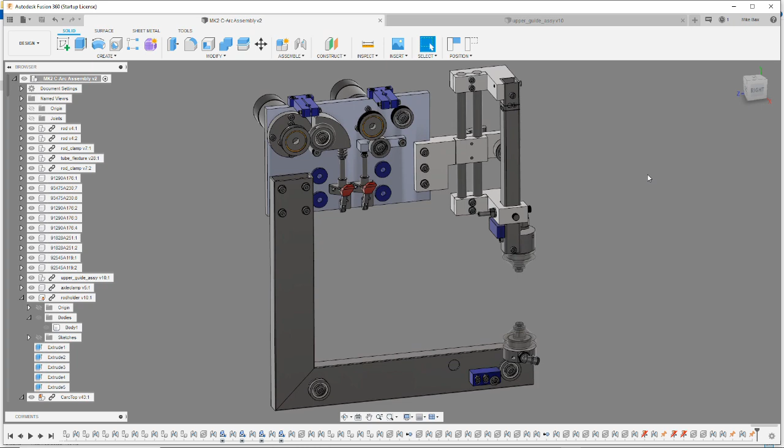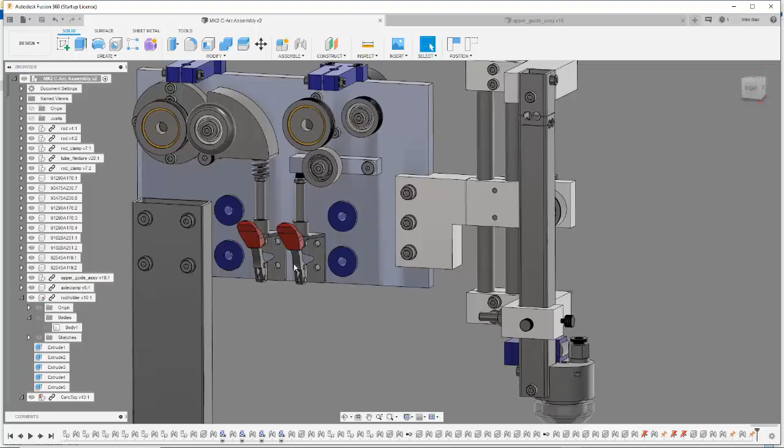Today we're going to make some more parts for the C-Arc. Today I'm going to focus on the wire rollers and two other parts. So the wire rollers that I'm going to make are these lower ones, this one and this one, made from 304 stainless steel, and this one here, same, also 304 stainless, and the Capstan rollers.

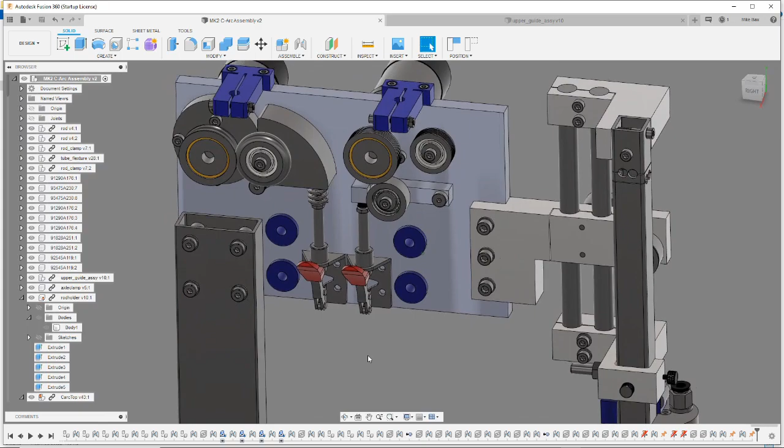So this grooved big one, also 304, and the smaller Capstan roller, also 304, and then this roller here is going to be just standard PVC plastic. So in my previous video I mentioned that I made these rollers from 304 stainless, and I actually did, but I intended to make it from a tool steel that can be hardened.

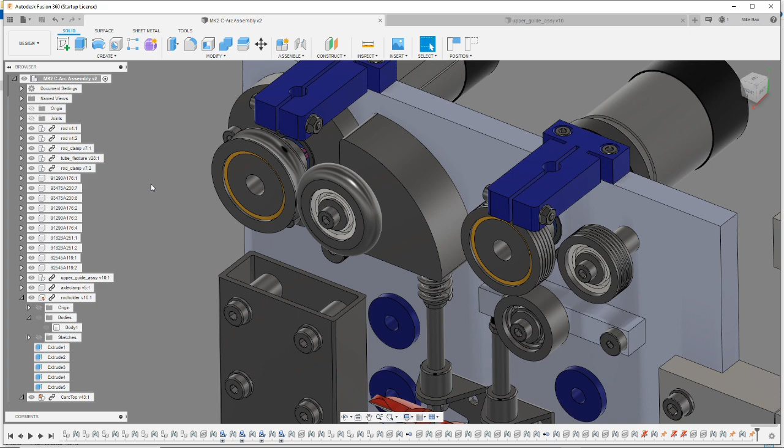However, somehow I forgot about that, and when I ordered them at the local job shop, I just mentioned that they should be made from 304 stainless, which is a bit of a mistake because they will likely wear and groove, and then I have to eventually swap them out for hardened wheels anyway. But it should be sufficient for now for testing when I have all parts completed, and then I'll see how fast these wheels wear, and I will swap them out later.

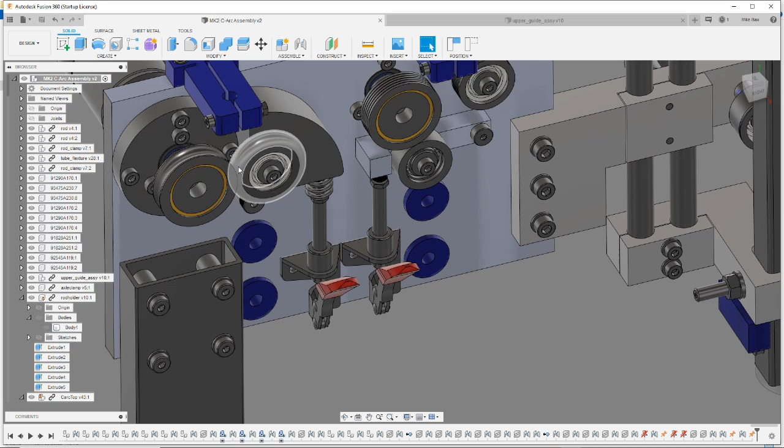So this wear happens because there's quite a high pinching force, but the same wear is not applicable for the other wire roller wheels. Actually, in my MK1 design, these two wheels are made from aluminum, and they have made many miles and they are still intact. So making them now from 304 stainless seems like a good choice.

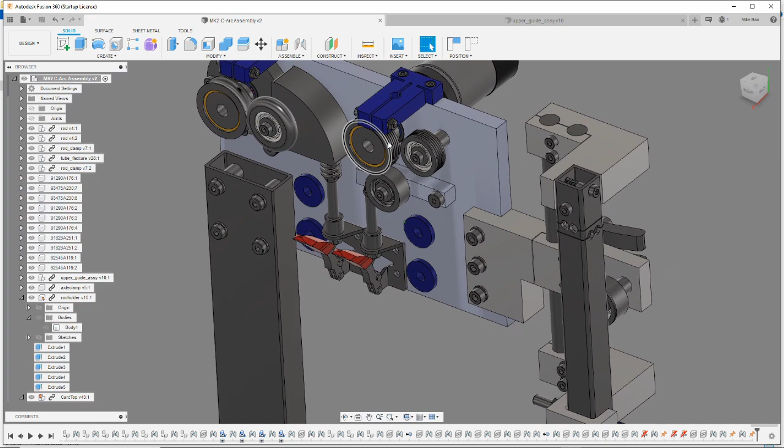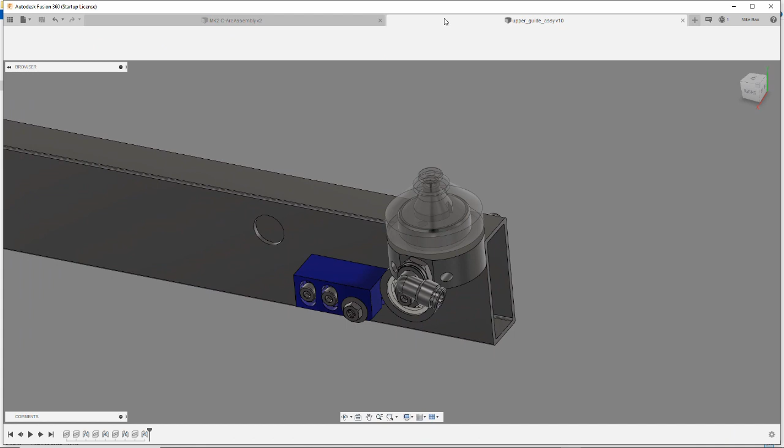Okay, so next to these rollers, I'll also make this motor mounting bracket. That's this part. And I'll make the wire guide mounts, so inside the wire guide bodies here. So let's look at the upper body. I can turn off the flushing nozzle.

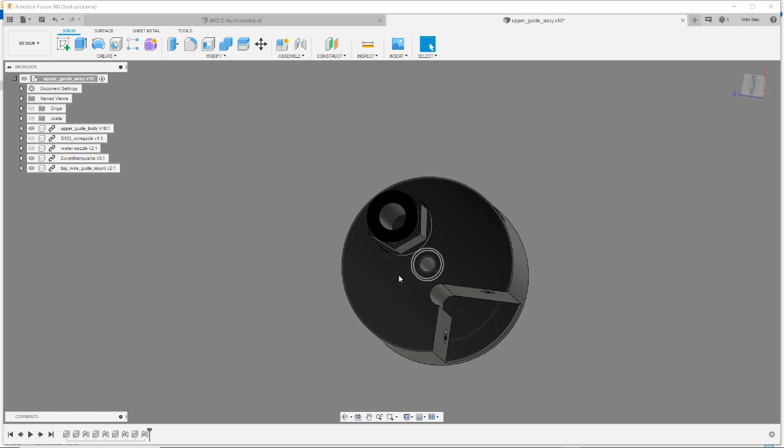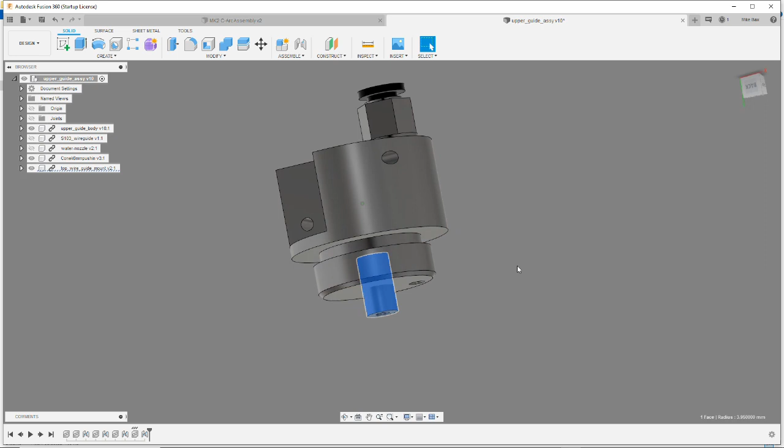So here's the wire guide, and it's screwed onto a wire guide mount. So when I turn this off, that's this part here. It runs all the way through the wire guide body, and it's threaded with M8 thread with a pitch of 0.75 millimeters. And I need to make this part for the upper wire guide, and almost the same one for the lower wire guide. The one for the lower wire guide is a bit shorter.

So I will make these parts, I'll take you through the manufacturing process. Let's have a look.

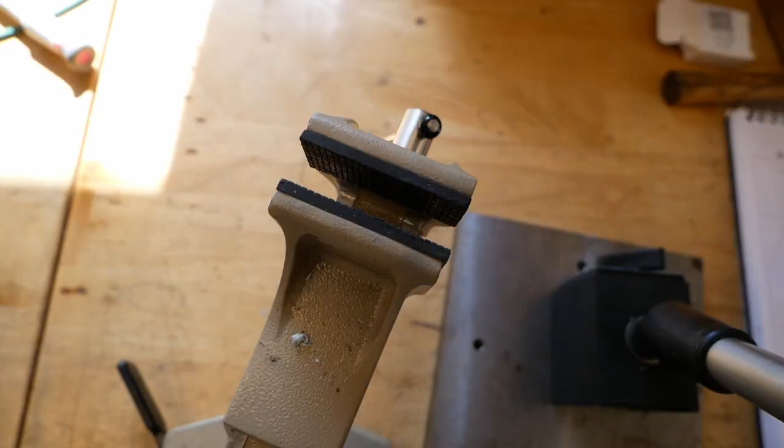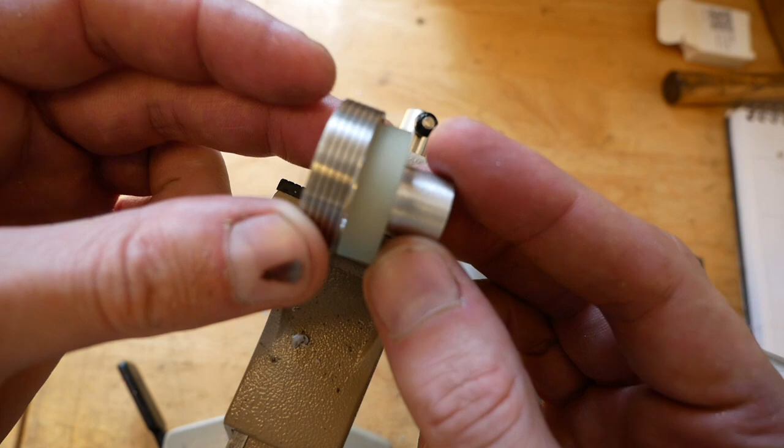So here's a roller that goes on the motor, like so. And this is for the Capstan drive. So I'm going to put this on the roller ring. And then the Capstan is electrically isolated because of this layer of urethane on top of the roller. So let's put it in.

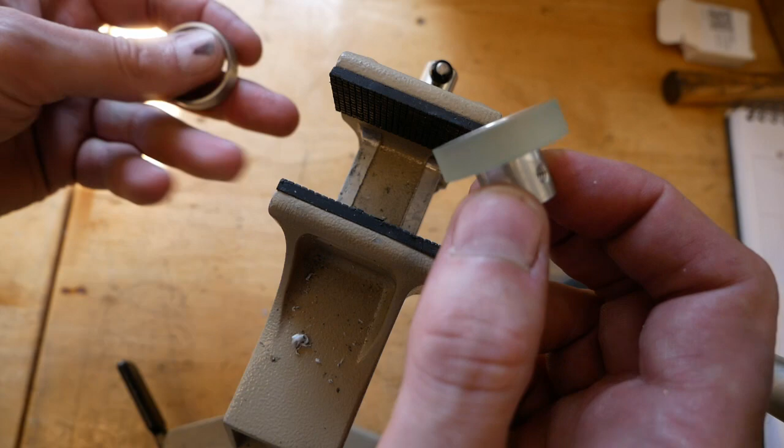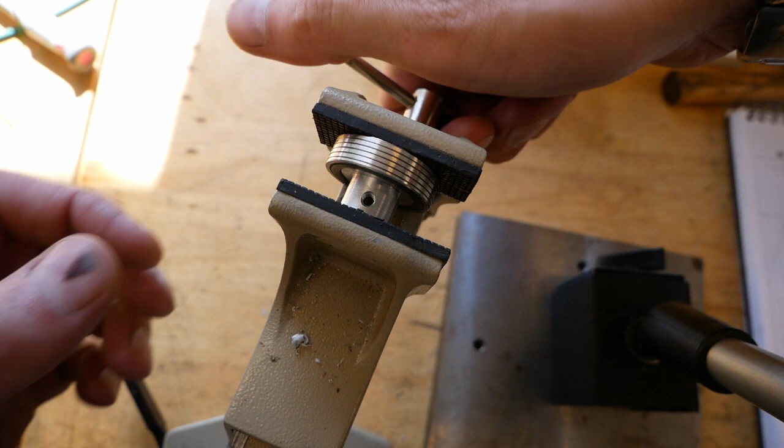Makes a super nice fit. Like so. Now we have an electrically isolated capstan roller.

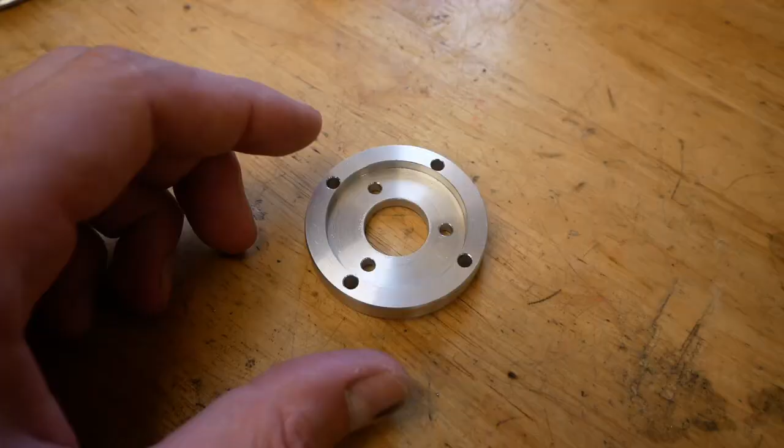Okay, so there's a bit of a time jump for the video of making this part. That's because when I just started, the battery of the camera was empty and I only have one battery. And I wanted to finish the part, so I just finished it without having any video material of machining this part on my lathe. I do have some video material of the next day where I drilled the holes, which I will show now.

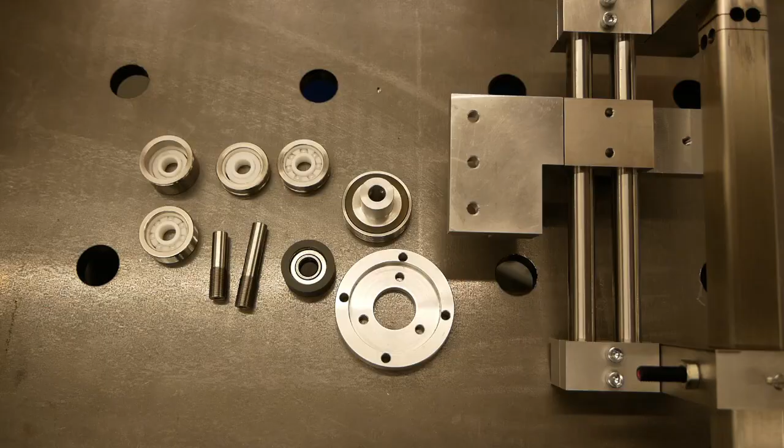Okay, here's the summary of the parts that I've made. So I've made two lower wire rollers, this one and this one. I made two capstan rollers, this one and this outside one. The inside is an OEM part. It's a roller with a urethane lining that creates the electrical isolation. I made the PVC roller with a standard steel bearing, and then the two wire mounts and the motor flange.

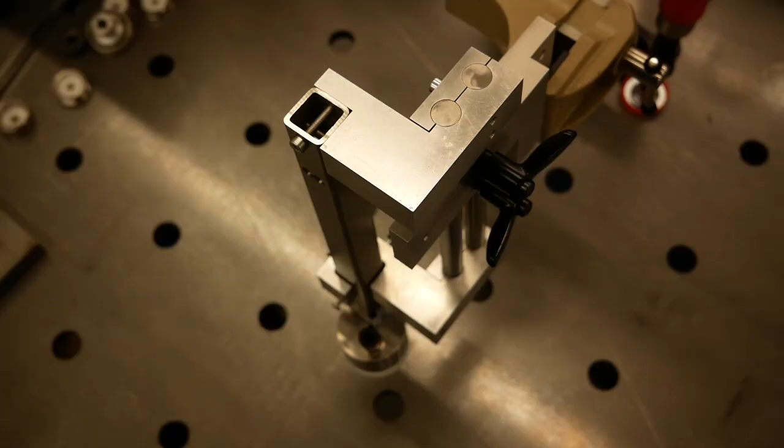And I also redid this part because in the last video I messed this up. Instead of tapping these holes, I drilled them through, which was wrong. So I redid the part and then tapped it this time. And yeah, that turned out really nice. So let's have a look at this mechanism. The mechanism for the upper wire guide is finished.

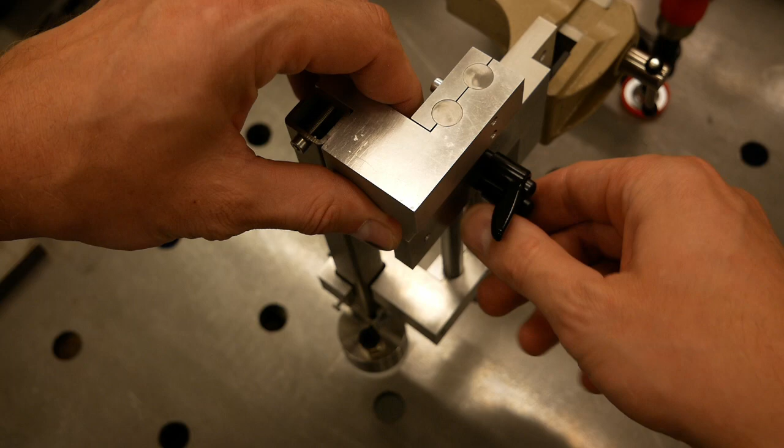I've put it in a vise here, so you can see how it's going to land in the machine. So these two clamps are really nice. You can just open these like so, and then you can raise or lower the upper wire guide, and then lock it again in place. That works really nice. And then here's the novelty, the flexure. So let's have a look at how that works.

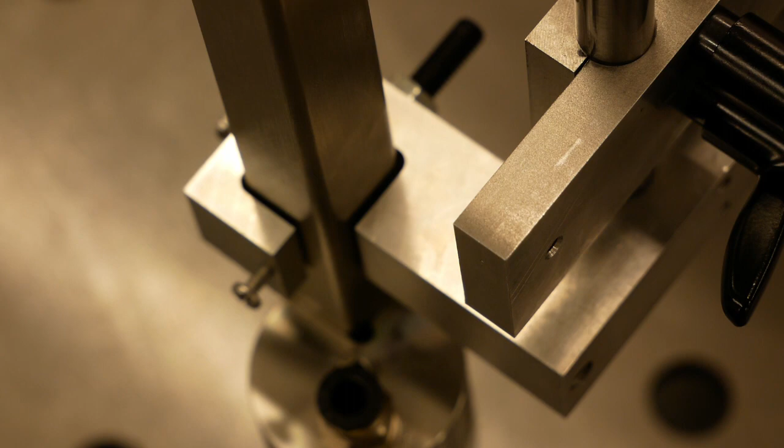So there are two adjustment screws here, and if I turn these I can very accurately set the position of the upper wire guide relative to the lower wire guide. So if I turn this clockwise, it goes in. If I turn it counterclockwise, it goes in that direction, and I could do the same for the other. And this is a really fine pitch thread, so I can very accurately position the upper wire guide relative to the lower wire guide. Now, this is really important for wire alignment, to keep everything straight and parallel.

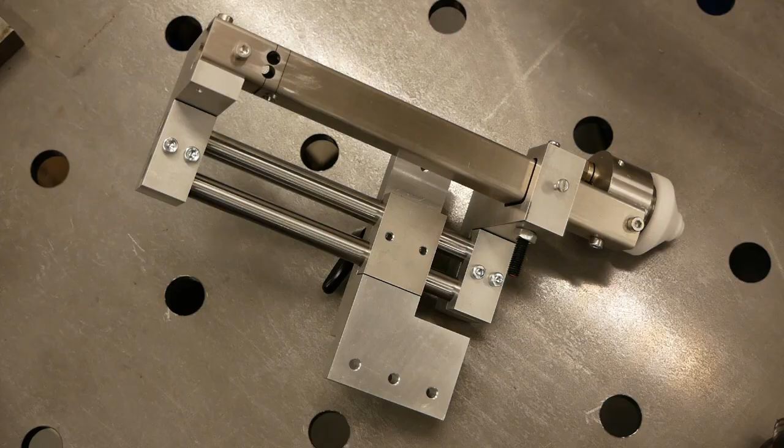So here's another view. You can see the clamps on the back. And this whole thing feels extremely rigid and sturdy, and it is. And here you can see the spring-loaded plungers, one on this side and one is inside here. So the plungers keep tension on the flexure, such that when you unscrew this, it backs up.

Otherwise, if you would unscrew it, it would just be loose. But now this is really very stiff in all directions, and you can very accurately set it. So yeah, really nice.

So next up, in the next video, I am going to make the mounting plate for mounting all components, mounting the motors and mounting this to the mounting plate and some rollers. And I think the video after that I'll do the fabrication of the lower stainless steel jaw, and the video after that I think I'll be testing. So yeah, we're getting somewhere.